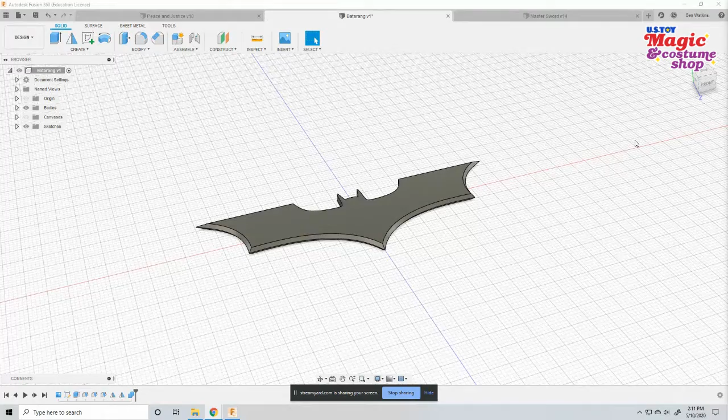Before I dive in, I should explain the software a little bit. This is called Fusion 360, and it will look really expensive if you go to their website, but if you are a hobbyist, you can obtain a license for free. So as long as you make less than 100 grand a year, you can get a free license to use Fusion 360 for your own personal projects as a hobbyist. So you can sell the designs as well if that's something you want to get into.

The program is pretty easy to use, but it is CAD based. If you don't know what CAD is, that's computer aided drafting. It's been used in architecture for umpteen number of years. Basically, you can draw something and then extrude that drawing into a three-dimensional shape. Of course it goes into a lot more depth there, but the idea is that you can create very accurate models down to a fraction of a millimeter.

Other 3D programs that are free, like Blender, are more of a sculpting program where you have like a lump of clay and you're trying to mush it around until it looks like the thing you want, but the scale might not be precise. You might have to use a different program to get it the size that you really want. But starting with a CAD program and using millimeters as your measurement, you can create a very accurate model that your 3D printer will print exactly the size you put into the program.

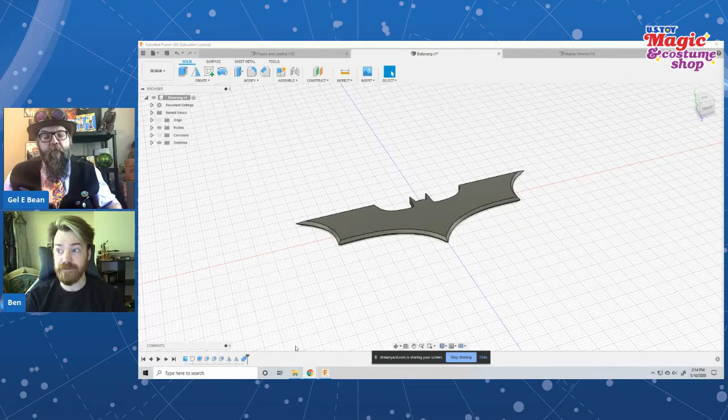Okay, right on. So walk me through like I'm just starting the project. Okay, what do I do? Let me back up this project here.

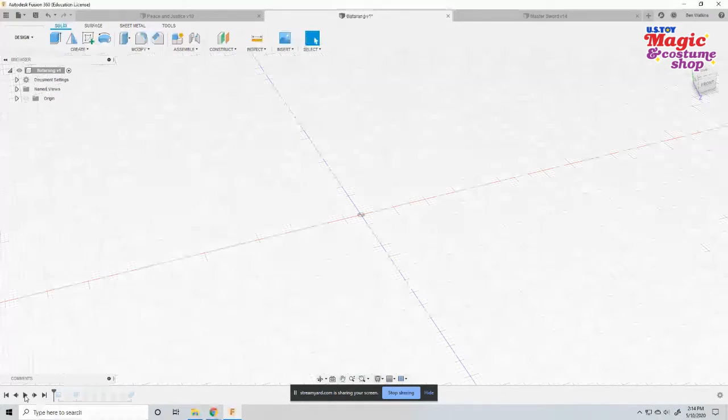You can see I'm dragging this - this is a timeline of the actions that I've taken for this project. It keeps track of everything I did, and I can hit the play button here, and it's going to go kind of fast. Unfortunately I can't slow it down, but you'll see different things happen really quickly, and then I'll go back and explain each one and how it was put together. So if I hit play, you see a picture, and then some things happen there. I know that was really fast - I'll play it one more time. You saw a picture, you saw a drawing, and then a 3D model sort of pop up out of nowhere, and then it was gone.

The first thing I start with is what's called a canvas - up here, insert canvas. You can place an image into your workspace, which makes life really easy for tracing things. You can use a different drawing program to draw your elements and then import them, though sometimes it gets a little weird about that, so it's always best to draw natively inside the program. But once you've inserted your image, you can calibrate your canvas by right-clicking on it, and if you pick 2 points on your image, it tells you an exact millimeter amount of what that distance represents. You can change that number and it will automatically scale your image to whatever size you tell it.

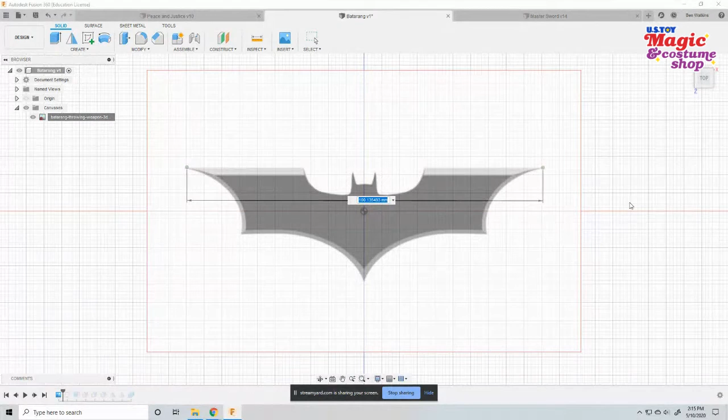Okay, so I need to at least have a drawing of what I want. It can be in 2 dimensions though - a two-dimensional image. Of course you could freehand everything, but because we're cosplayers and we're trying to recreate things that already exist, this is probably the best way to make that happen. Okay, so does it need to be in a certain format, like a PNG or a GIF? No, it'll take pretty much any image file - anything that is considered an image file, it'll take it.

Since we have that canvas on there, the next step would be to draw on top of that image and create what's called a sketch.

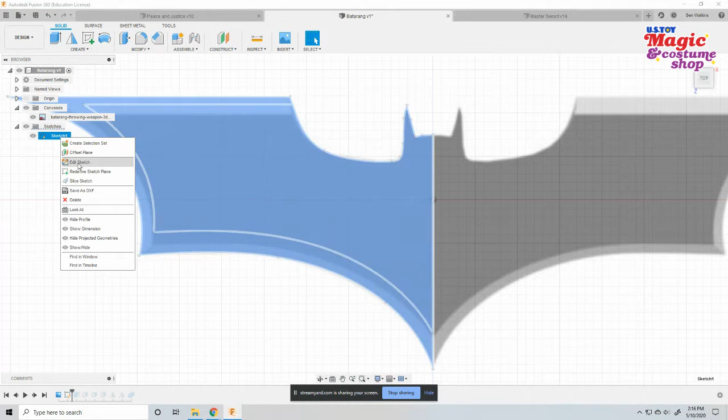You can see these black dots sitting around the batarang here, and some lines on top of it. Over here at the top, we have create a sketch, and I'm just going to go in for editing mine so you can see what that looks like. It doesn't look very different at the moment, but there's a lot of different drawing tools here, creating lines and curves, rectangles, circles. You can mirror your drawing, creating arcs and splines.

I don't want to get too far into sketching because that could be a whole lecture in its own right. Well, just riddle me this, Batman. Where do I even start with what tools here? What did you do to get that? Like you said, draw a sketch.

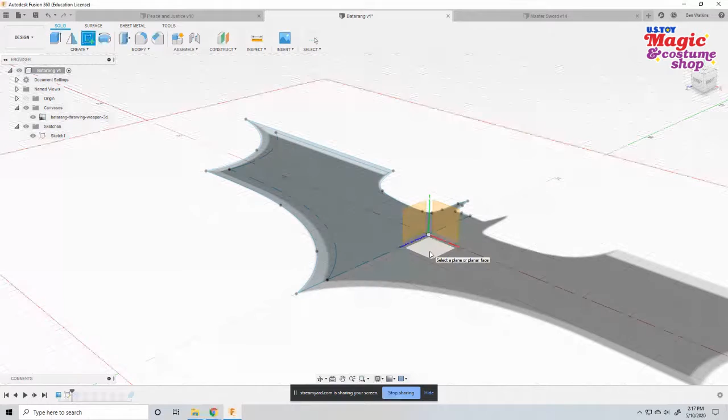What's next? In here that says create sketch, and it says use sketch mode to create basic geometry. So if you click create sketch, it'll ask you where you want to put this sketch, because everything's in 3 dimensions. You can sketch on any of the 3 planes. I would pick the plane that your drawing is on, and then you can take a line and start drawing.

You want to create what's called closed shapes. It doesn't matter what you draw, all that matters is that it's completely closed. So when I hover over these, each shape highlights, and that means it is closed, and that means it can be turned into something 3D.

But if I had just a couple of lines here, see, there's no shape there. It's not closed because there's no connection between these 2 endpoints. So this cannot be made into something 3D easily.

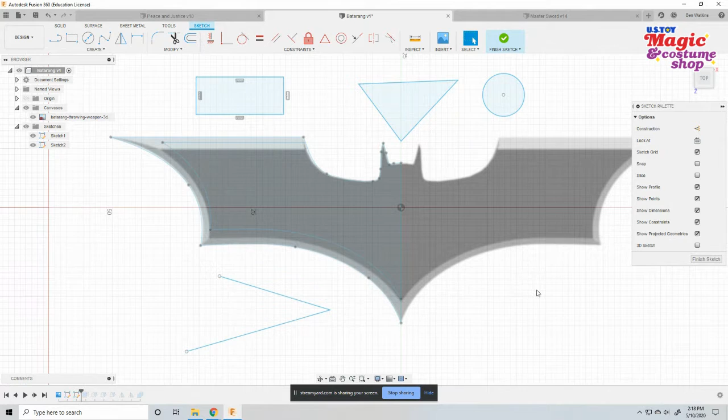So, me being pretty thick-headed, I would just open up my graphic. I would draw on the plane that graphic is on, and I would take the tools necessary to make an outline of that graphic.

Okay, that's where we start. You just want to trace, that's what you want to do. So this shape right here that I've highlighted was me tracing around the outline of the batarang, or what I consider to be the top surface of the batarang.

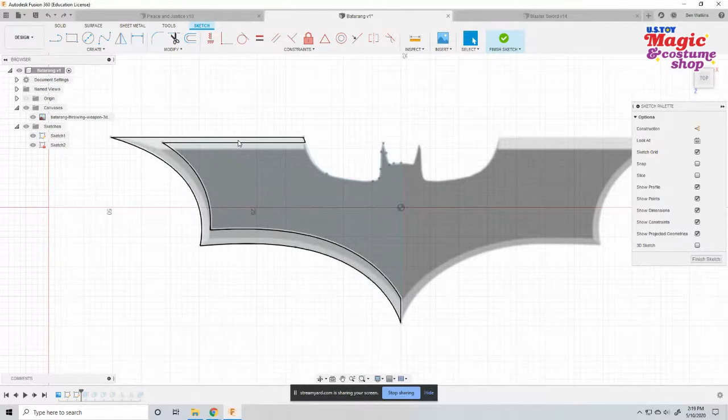Then you'll see there's an extra shape outside of that, and that represents the bevel, because we know that batarangs have a sharpened edge, and we can see in the image that it has a bevel. I drew these 2 shapes to then move to the next step, which is what we call extrusion.

So we have made a sketch, and now we're ready to extrude it. I'll show you what the extrusion step looks like, and then I'm going to back up and do it for real.

So up here, these major tools are basically all you use. But the create menu has so many options in it, you can create so many different things, but we're going to stick to the basics. Extrude is the easiest thing you can do. It adds depth to a closed shape, so it makes it 3D.

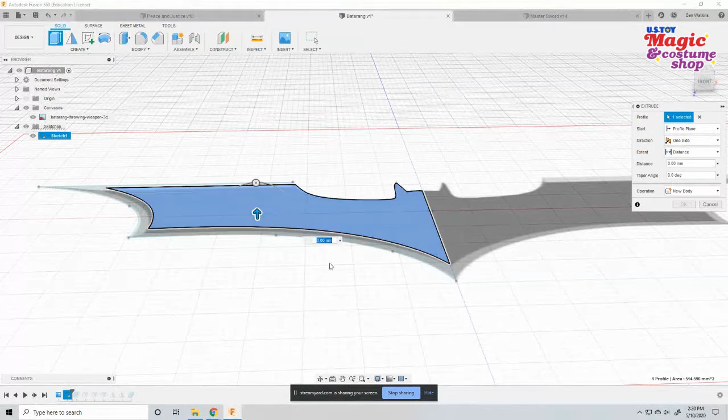So if we click on extrude and we click the shape we want to extrude, then we can click and drag this arrow. And you're just giving it depth right there.

Is what you're doing with extruding giving it depth, correct? Yes. So it tells you in millimeters or centimeters how thick it's going to be. It is in millimeters, everything with 3D printing is in millimeters. Staying in millimeters is the best way to go.

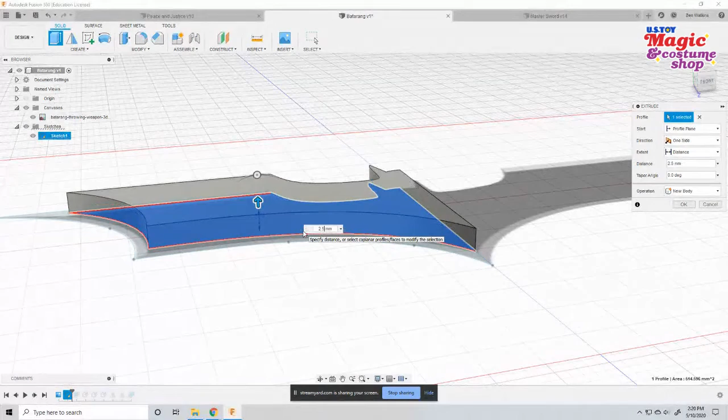You can click and drag your mouse to give it a different height, or you can type in the box and give it a very specific height. And then once you hit OK or hit enter on your keyboard, then you have a 3-dimensional shape.

So do you keep a ruler close to you with millimeters and centimeters to kind of give yourself a point of reference?

For the most part, I've memorized how many millimeters are in an inch because I do this so much. You're one of those guys who does a pinch of this and a little bit of that in every recipe, aren't you? A little bit.

Okay, sounds good. There's no shame in bringing up Google. If you bring up Google and just type millimeters to inches, it brings up a calculator and you can enter the millimeters and it'll convert it to inches, or vice versa, so you can get a better idea of what's happening.

Is something going on with our sound? I see a comment about sound. In and out, but that's just more or less the nature of the streaming that we're doing. Okay, I just wanted to make sure that I was all right. Yeah, you're absolutely good.

So we have this semi-flat 3D shape. Then we want to create the bevel that goes around the outside there. I think when I originally did this, I tried a few different methods. We're going to stick to something really basic because there are multiple ways to do this bevel.

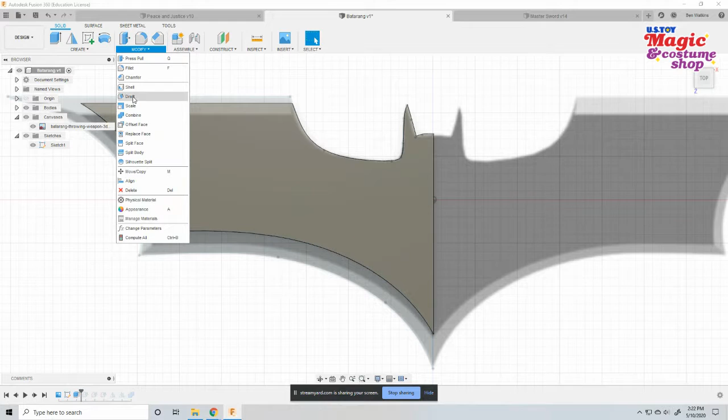The easiest is what's called a draft. A draft allows you to choose a surface, and it makes an angle for that planar face. So one face of a 3D object is a planar face, and by selecting draft, you can select that face, if it'll let me.

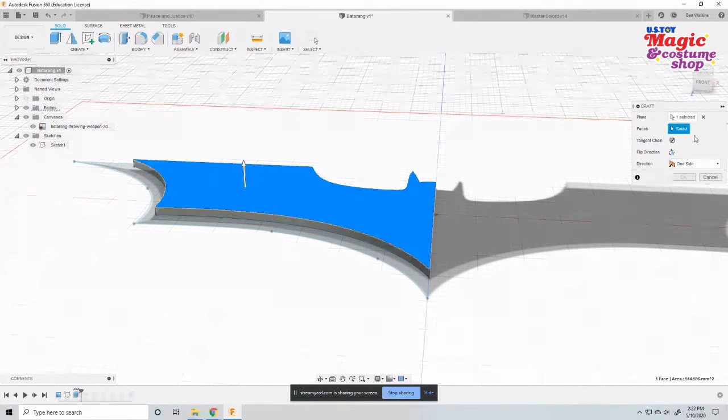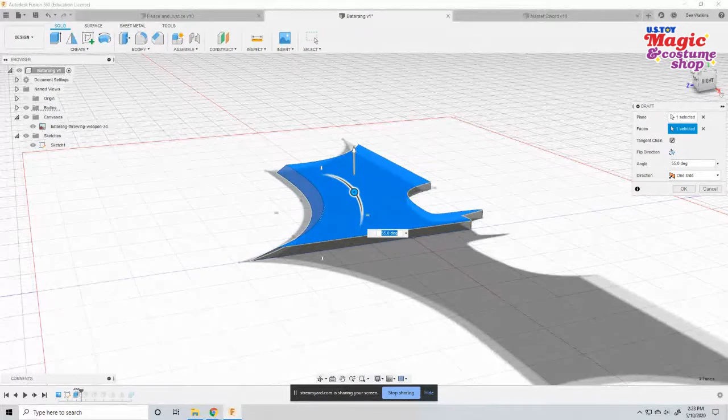You can select that face, and by turning a number of degrees, you can create what's called a draft. And that's a CAD term. But see how I can make it much bigger or much smaller, just depending on what I think looks good is what I would stick with.

And I would do that to each area that needs a bevel. It's pretty straightforward, not a real difficult tool, it just takes a little bit. So the draft there, that's their term. It's like Tokyo Drift, but in the past tense.

Okay, gotcha. Yeah, it's like the past tense of Tokyo Drift. Sure, okay, we'll go with that.

So do you usually just make that draft connect to the other shape that you made, or what's the dealio? You'll notice that it does not line up with the other shape there, and I think it's because I decided that the bevel would be a little too wide. So this is just what I thought looked good. And that's something you want to remember as you're 3D modeling: trust your eyes. If something looks off, it probably is. Just do what you think looks good.

Okay, so your bevel doesn't have to meet the other thing that you sketched out. Not necessarily. The other thing I sketched out, I apologize, that might have been confusing because I had drawn it with a different method in mind and then ended up doing something simpler later. And that happens too, a lot of this is experimental. So if you're getting into 3D modeling, just play around with it and try something, see what happens, and then go, oh okay, that was cool, or oh no, that didn't work at all.

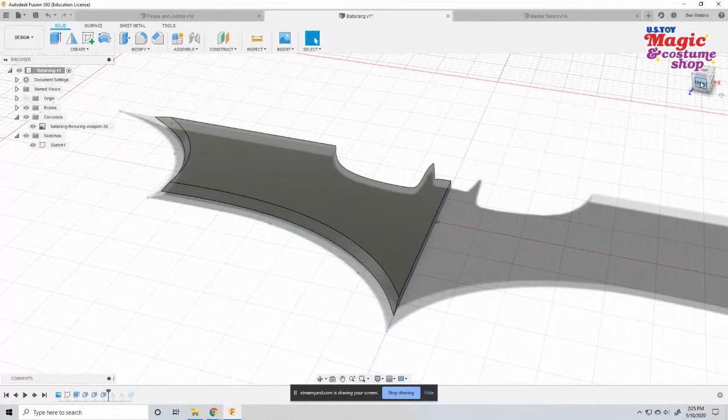Okay, and so this took you how long to print out? Like what happens next, once you got the bevel and everything? There's only half of a batarang here. The reason I only drew half of it is because I wanted to make sure that it was symmetrical.

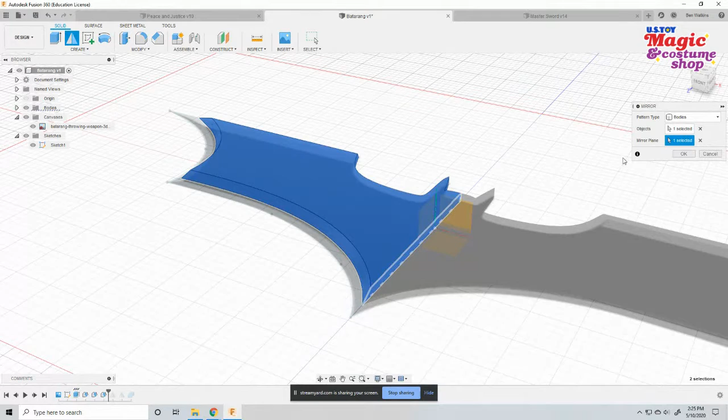And so the next step is what's called a mirror, and mirroring is really, really cool and really, really easy. So up here in our main tools, mirror, if I choose the body that we've created, which is just the name for our 3D shape in the program, they're called bodies. If I select the body and select the midline of the batarang as my mirror plane and hit OK, it mirrors the batarang and makes the other side for you.

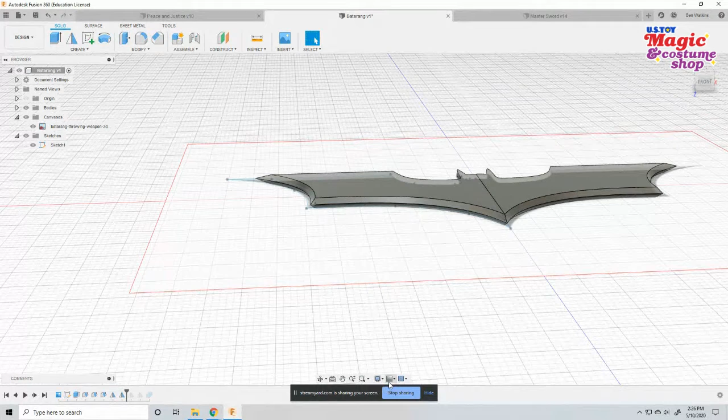Nice. And then if I mirror both of those halves, but then select the underside as my mirror plane, I can double the thickness of my batarang and it'll have a double bevel, which would look really, really professional and cool. So I'll get rid of the grid and the canvas so you can see this better. Now you can see the two halves and how that looks more like what a batarang probably would look like.

And those two mirror actions took a second to do. Okay, now I've got a model of a batarang. How do I mass produce these things? Because I've got crime to fight in Gotham City.

Once you've completed your model, you can right click on it and there's an option to save it as an STL file. STL is a universal file type that 3D printers will read and then print. So once you have an STL file, you would take it into a slicing program, which breaks down the model into code to tell the 3D printer what to do in order to build that object.

Nice, that's just absolutely fantastic. All right, I'm going to ask us to move on to another thing here.

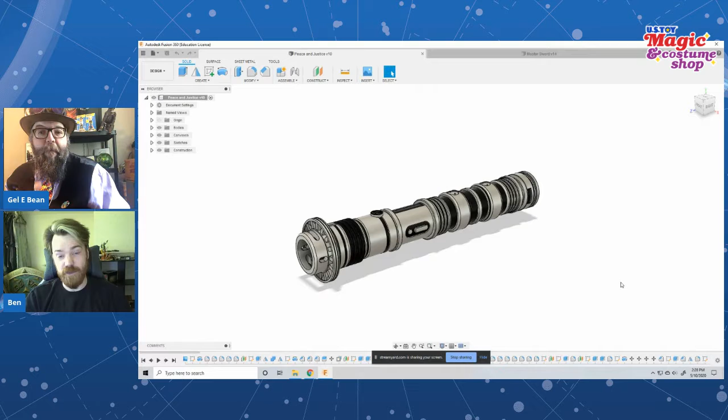They also use very similar parts at the lightsaber shop at Disney World. Of course, I did not make mine exact to Disney's plans because I don't have access to those sabers, but it is inspired by that same design and similar terminology.

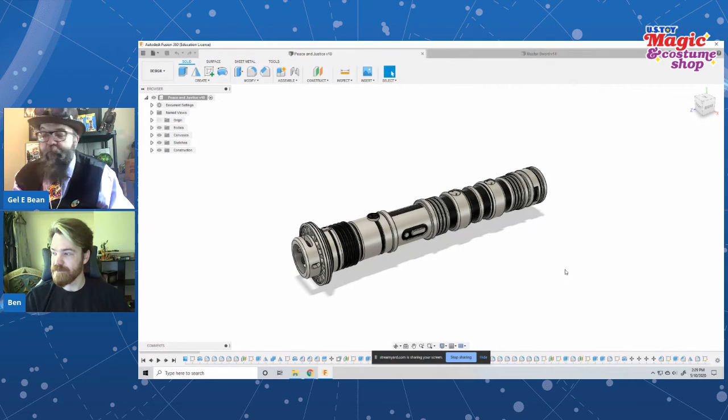Yes, also to comment on Jonathan Kipp's comment there, a 3D metal printer is really cool if you've got about $30,000 in your pocket, if you want to print in metal.

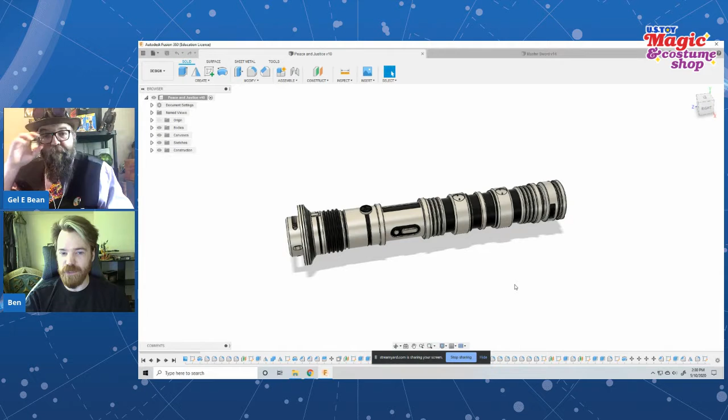So with lightsabers, they're cylindrical, which makes them easy, but also they have some complexities. The complexities come in with the details around buttons and textures and things like that, especially the emitter end with these little fin things here. That was an interesting process. I'm going to walk through just a few of the things I did. I'm not going to go into as much detail because that would basically use up the rest of our time.

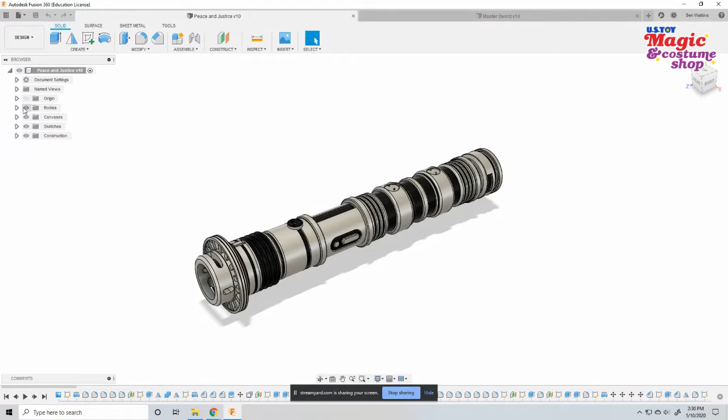But basically, in the first example, we were using Extrude. With lightsabers, we use an action called Revolve. Revolve takes a drawing that you've done and rotates it around an axis and creates a cylindrical shape out of that drawing. So I'm going to hide the bodies, and you can see this giant list that popped up here. These are all the sketches I made just for that lightsaber.

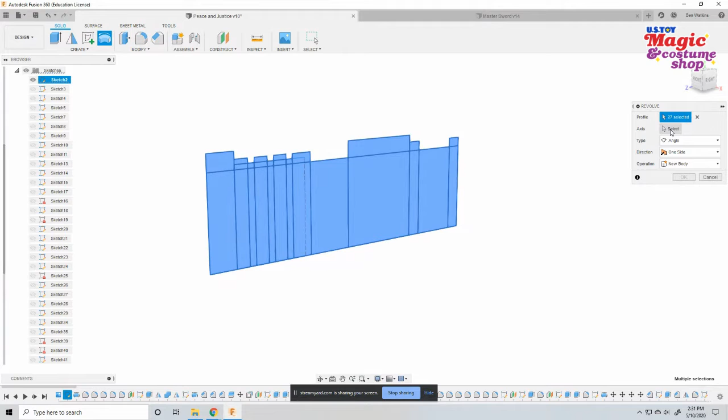Oh my gosh, one of the first sketches I made looks really, really simple. But when we go to revolve and we select all those shapes and we select the bottom line as our axis, then we can click and drag.

There we go. Click and drag your mouse, and you'll notice that it takes my shape and rotates it around as far as I want it to. I can create a quarter of a lightsaber or a half of a lightsaber, depending on what I'm doing, or I can just create a whole 360-degree shape. And from that simple sketch of a bunch of rectangles, now I have this super complex textured cylinder.

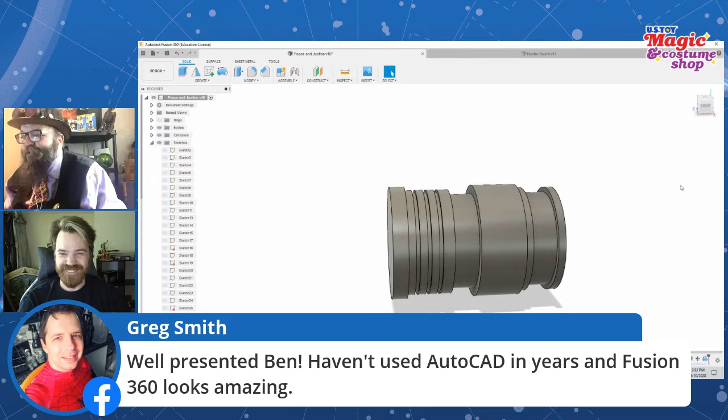That was sweet. It was like taking just a plain board and turning it into a lathe, on a lathe into... Yeah, that was really, really sweet how quick and easy that was.

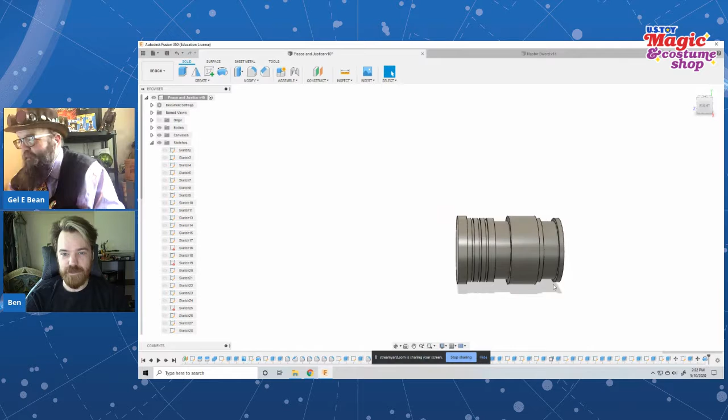And so you did a bunch of those little parts and joined them together to make a lightsaber. Is that essentially what's going on? That is essentially what I did. Some things that I did were called fillets and chamfers. These are things that just make the model look nice.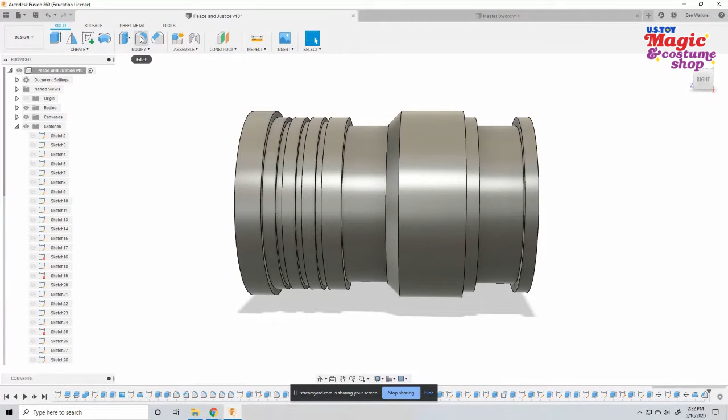So these two tools up here, if I go to chamfer and select one of my edges and click and drag, you'll notice that I can create an angle, and it creates the angle around the entire object. So now it has a slightly different profile. I didn't have to draw that—I was able to just draw rectangles really quickly and then use the chamfer and filleting tools to make things look either round or angled.

So that's kind of like the drafting we saw with the bevel, but in 3D on a circle. Yes, drafting would look quite different on this kind of model. Probably not something we'd want to do, but fillet and chamfering is just a way to soften your edges and make your model look nicer.

Okay, excellent. What's next? All right, let me undo that stuff. Let's go to... where am I at here? Let's find it.

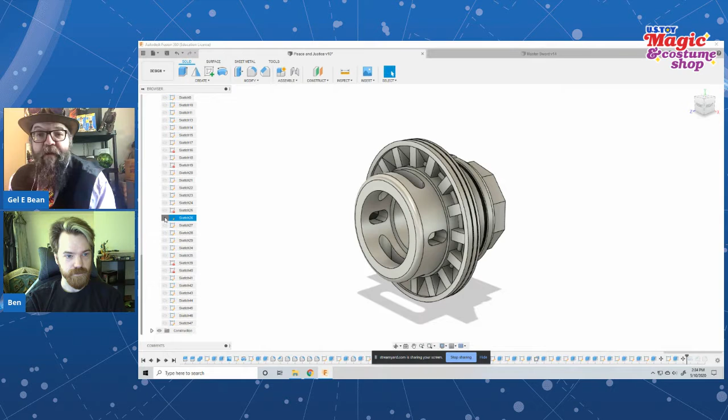And you can either work—Ben, do you print things for people after they've designed them? If they want me to print something, then that is within the realm of possibility. I will only 3D print kits, so I'll only 3D print the raw parts and then send them to you. I don't do finished props anymore—unfortunately they take a lot of labor and love that just goes outside the budget sometimes.

I get you. And you know, if people are looking for other things, if you're not available, they can go to Hammerspace and get some of the printing done—they can send it to that as well. But they can get help from you just by calling you up and paying a little bit for help and services, right? Or can you design stuff for them and send them a file? I have done designs and sent files. That is also within the realm of possibility. I don't mind doing that.

Most of the designs I make, I also put up on CG Trader. They'll also be going up on Etsy soon-ish once I get the bugs worked out with renders and stuff, because Etsy requires really big images. But anyway, they'll be up on Etsy, and they're up on CG Trader, where you can buy the models that I make.

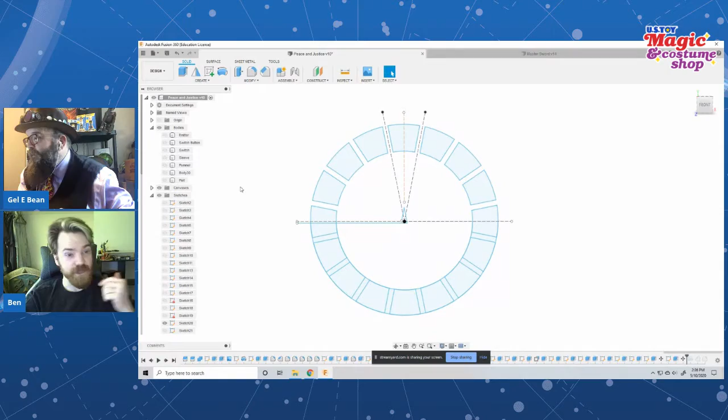Sweet, all right, let's see what you're working on—show us something new. So this is where the emitter came from. You'll notice all those fin-looking things there, and these shapes here. Basically, I think this might have been a slightly older sketch, but the process is the same. Let me see if I can...

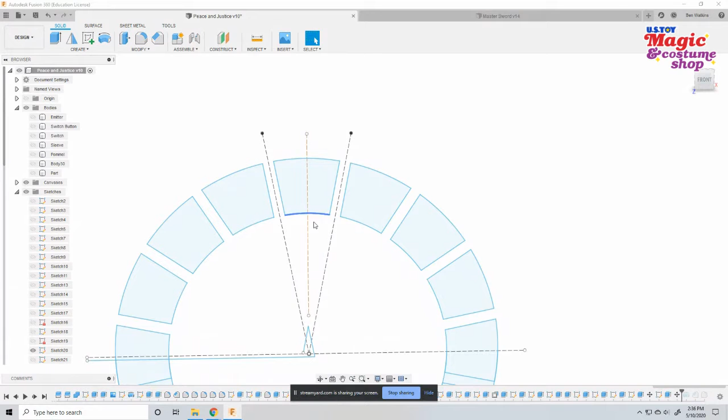I'm going to delete most of what we've got going on here. Oh, come on.

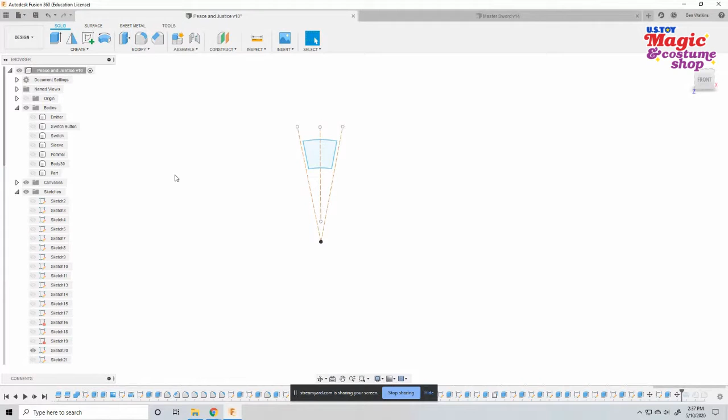Yes, I know, it's going to be angry at me for a minute because it's got to re-render all that stuff. Well, when you start deleting things that have later actions that it affects, then it gets upset. You're messing with the time and space stream, Ben, by deleting all those parts. That's why it's upset with you. Okay, I get it, I am messing with time and space.

Let's say that you had a pattern like our emitter where there's a bunch of these shapes going all the way around. You'll see that I designed the negative space in between these bridges because of the way that I wanted to do it. But the idea is we're going to create a repeating pattern along a circle.

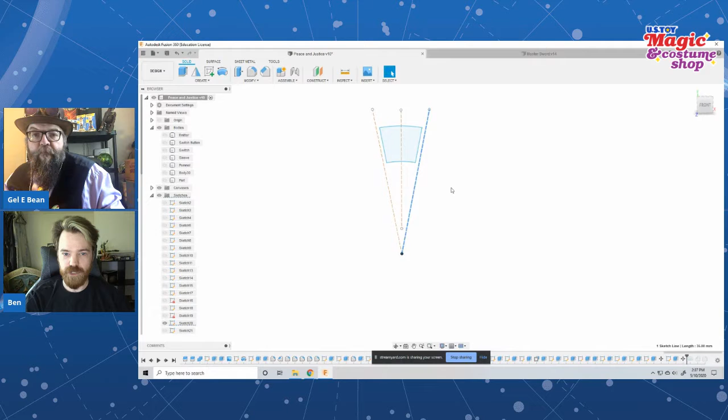So the original sketch that you saw would be a nightmare to draw out, because you'd have to do all kinds of sketching to try and make all the pieces look exactly the same. But if I just draw one of them and have these dotted lines, which are called construction lines that you can create... let's go into edit sketch.

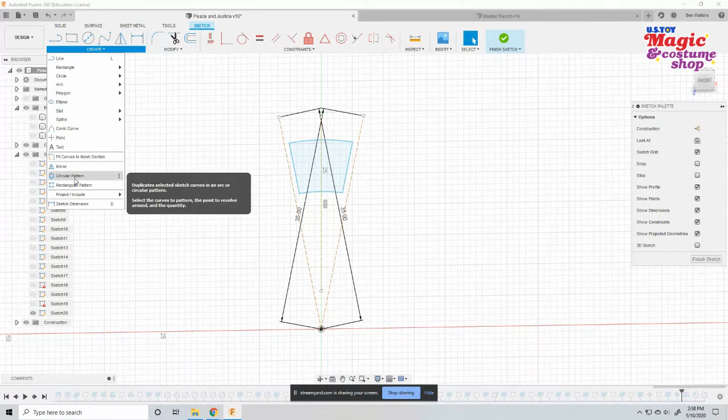If I go to my sketch menu and go to circular pattern, I can select the shape that I've created, select the center point that I want it to rotate around, and then tell it how many of these I want. Right now the default is 3, so I can go up to 4, 5, 6, 7, 8, 9, 10 of them. See, each one I add, it just squeezes them closer and closer together until I have the number that I want.

And does it automatically do that, so you don't have to do any thinking? I didn't have to do anything. All I did was select my shape and a central point that I wanted it to rotate around. Now I have a sketch with 14 identical shapes rotated around an axis.

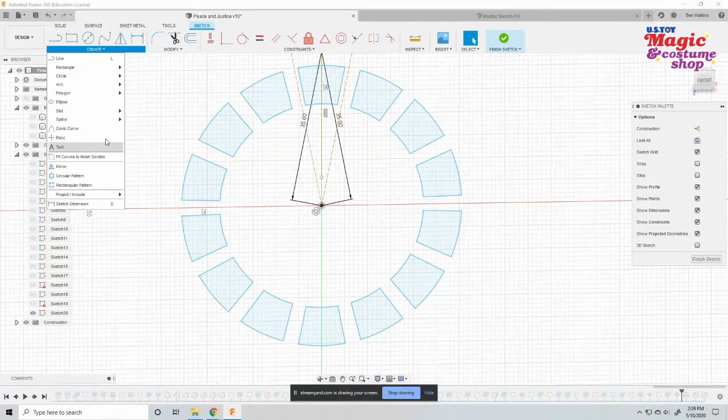You can also do something similar with what's called a rectangular pattern. It creates the same shape along rows and columns instead of around a circle. But since lightsabers go around a circle, that's probably the best way to go.

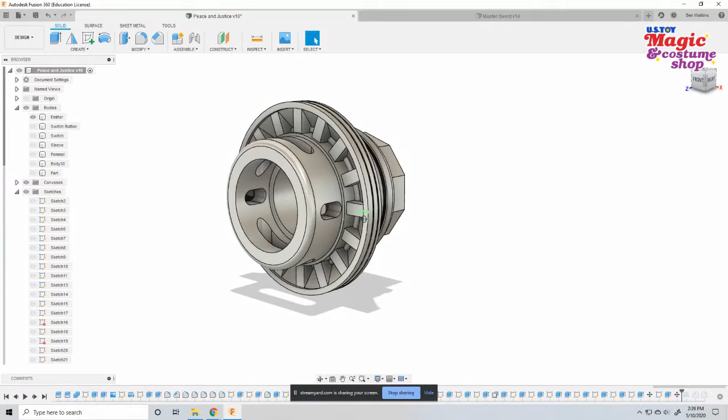I'm going to undo all that damage I just did. So that was essentially how I created the cavities that made up that shape there. Everything else is basically just revolved cylinders like the original action that we did. And then these cutouts are super easy.

To get these little vent cutouts, you just draw a shape, and then when you extrude from one object through another object, it will change what it wants to do. So let me make a quick sketch here and I'll show you what I mean. We're not going to make this permanent, we're just going to do something random.

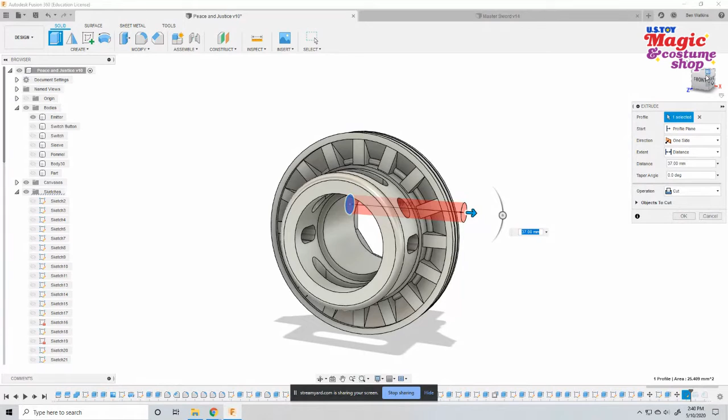Let's say that I wanted a hole through that - why I would, but let's go for it. So I've created this sketch out in 3D space, and if I extrude it through my shape, you'll notice that it turned red. And when it turns red, it changes its operation.

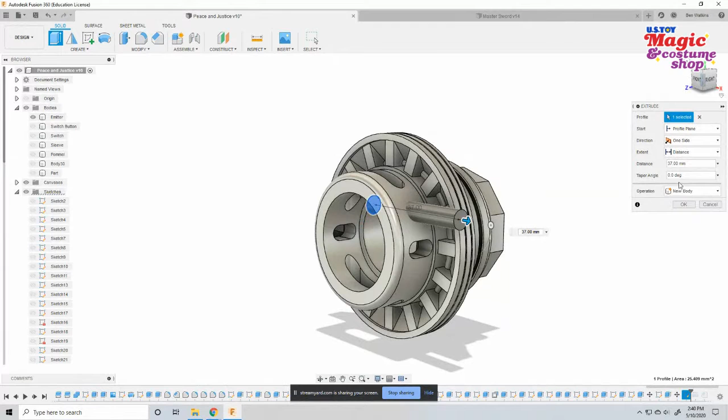You can tell it to cut through things, you can tell it to join to that shape, or you can keep it as a separate new body, which means it has no interaction with what you're doing right now. Or you can create an intersection, which means it's only going to leave the part of the shape where your two extrusions intersect or interact. So there's lots and lots of options, even with just the extrude command, to create much more complex designs.

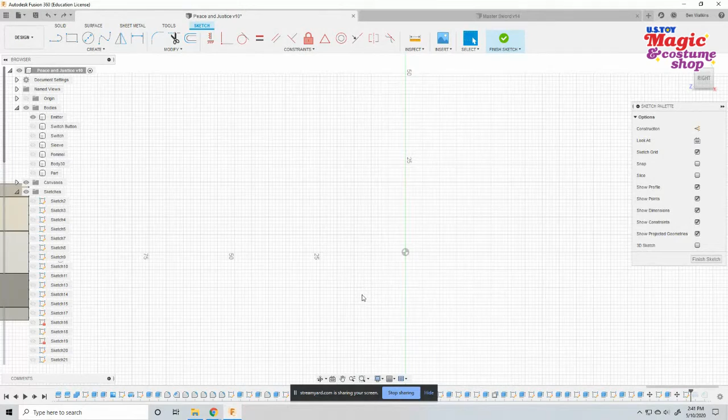Yeah, well, that's absolutely crazy, Ben. Okay, so when you design a lightsaber with all these different parts, and then you just connect them back together in a larger file - how does that process look like when you're building it?

So you'll notice that here - I'll go ahead and move some of these parts so that you can see them separated.

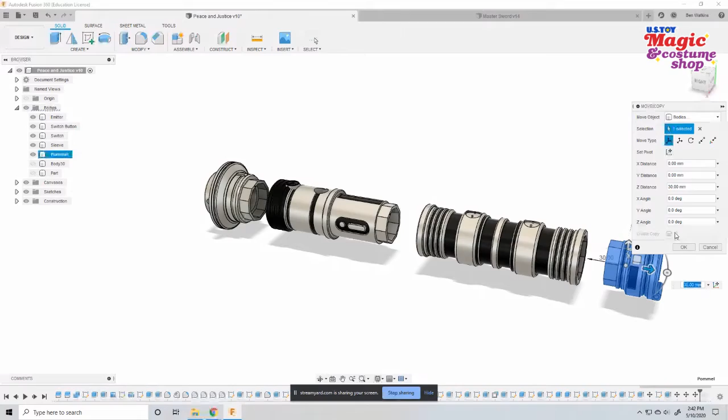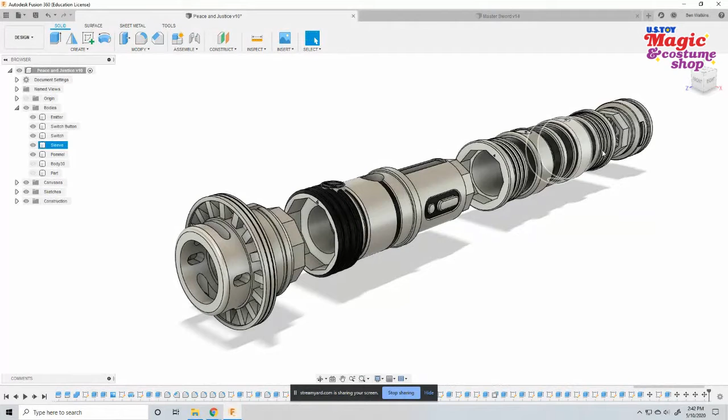So I'm moving my solid bodies, the things that I want to be interchangeable with my lightsaber. You'll notice that I had some hidden objects in there. Each one has a different number of sides so that you never mix up which part's the emitter and which part's the switch, and they always face the correct direction. Essentially, I created a geometric shape that I cut into one piece and extruded from the other piece, so that I could create a connection.

Now, if I wanted this lightsaber to just be one solid piece, I could have these shapes together, and then if I save it as an STL file it doesn't keep objects separate, so it would sort of weld everything together automatically. But if I save each of these bodies as an STL, then I would have a separate file that I could print individually.

So you make one big file and then export as several smaller files. Yes, in manageable chunks, and the manageable chunks are for my printer size as well, because that's something you have to take into account. Like when I was making the swords, I could only have so much of a sword blade fit on the printer, so I had to divide up my project into chunks that I knew the printer could handle by being familiar with my printer size.

The Talion project was built on a $100 tiny printer that was a little workhorse, but it was a DIY kit, and it was not very good.

Nice. Well, hey, real quick, we're coming up at the 45-minute mark, and I want to get into that Talion and see if we can talk about it, because those are so awesome.

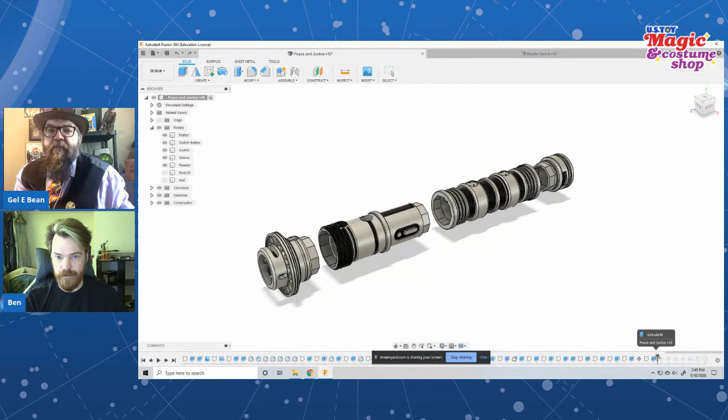Ben, let's talk about Talion and that sword and how that goes. John, once again, real quick, thank you for putting that up. If people go to your Twitch stream on Monday night, they can ask more questions. If you have any questions, please do put it down. I do want to point out Greg Smith right there, Dustin, and Greg saying, well presented, Ben. Haven't used AutoCAD in years, and Fusion 360 looks amazing. Greg's one of our favorites from Camp Cosplay, it's good to see you, Greg, and thanks for tuning in.

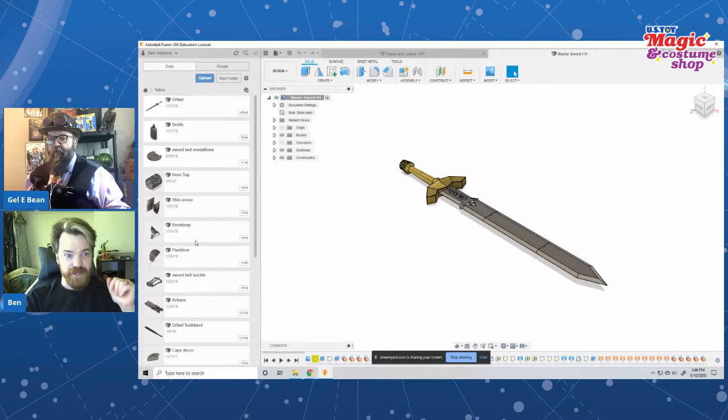So what made them unique was it was my first time trying to 3D model, and I had to learn how to put a sword together with some pretty advanced techniques without knowing everything. It was a really, really tough learning experience, because there are some really unique shapes going on with Talion's sword as opposed to something like Link's Master Sword.

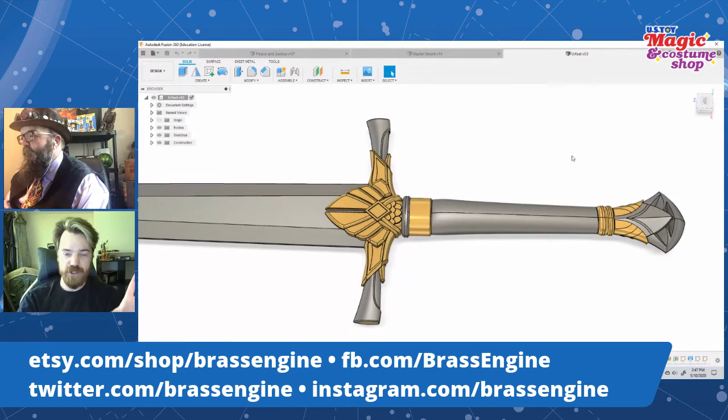So this would be a representation of much more advanced modeling. You'll notice that there are a lot more organic shapes going on, lots of curves, lots of cuts, and weird feathers and wings kind of things going on here.

And a lot of it had no tutorial whatsoever. You could not find any way of somebody else having done something like this. The only tutorial I was able to find was a guy that made a knife, but it wasn't for 3D printing—it was just, oh, here's how I would model a knife. I ended up using maybe one method that he used, but the rest just weren't going to work for what I needed to do.

You're one of those guys that just likes to see a difficult problem to see if you can make it happen, aren't you? I mean, yeah, probably.

But this particular project uses what's called surface modeling, which is a completely different ballpark from what I've been describing up to this point, because there are other modes of using the software. We were in design mode, which is basically just for creating solid objects and geometry. Then there's render mode for making things look pretty, animation mode where you can show how things work, and simulation, which is interesting for engineering projects.

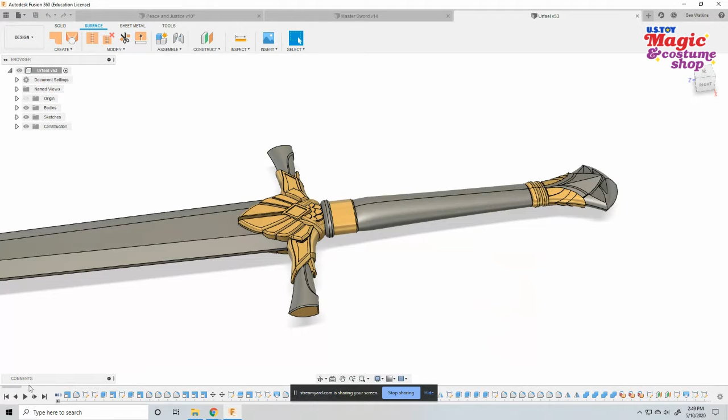Yes. I can't show you on Talion's sword because there's so much going on here that it would bog down my system if I try to change anything. We're going to go to the Master Sword, or the version of the Master Sword that I created, because it's a lot lighter model as far as how much is going on there.

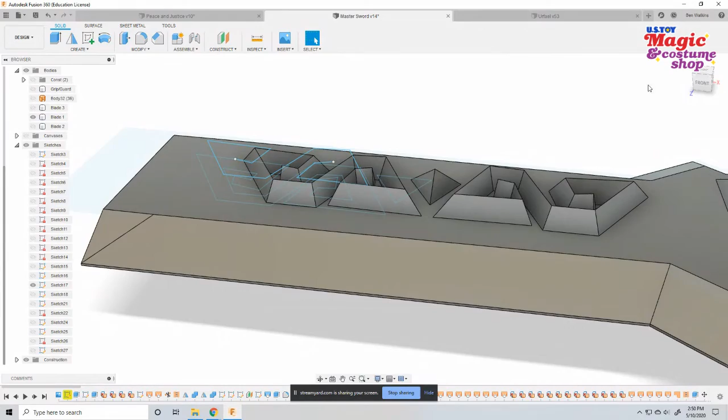So we're going to find the sketch that exists. There it is. All right, I'll turn it so you can see the shape here that I wanted to create. Looks like a little pyramid and this sort of weird S-shaped looking thing, right? Yeah, and I think I drew those when I was in the 5th grade to be cool.

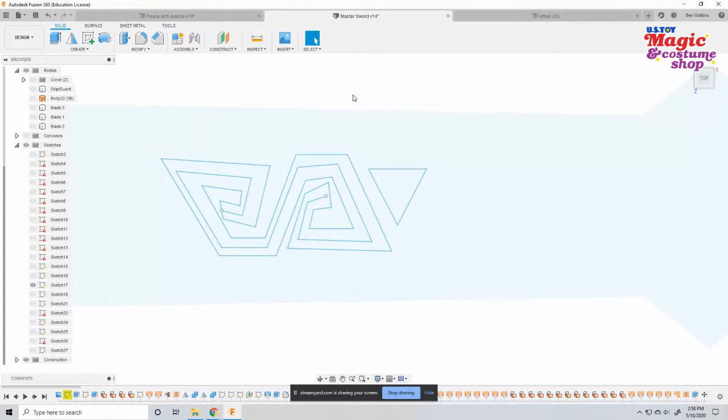To create this, I tried a couple of different methods. The first thing I did was I created my S shape, and I tried to extrude it up and then draft angles around to see if I could get it to meet a central point. It wasn't working because the angles are not equal all the way around the shape. So this was going to require surface modeling.

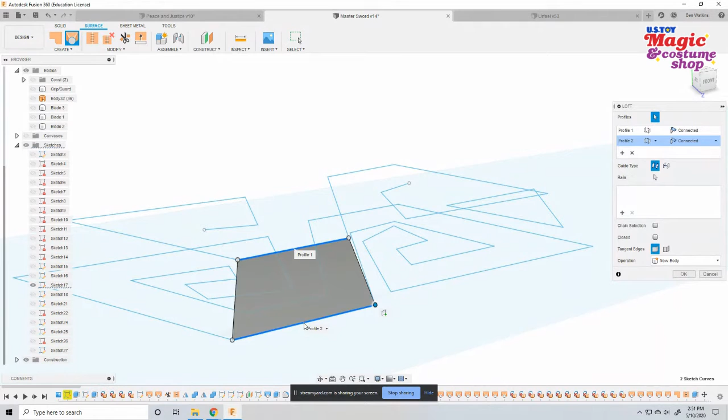So I had to create my closed S shape. Then I had to create a drawing a distance above it for the center line of that S shape, where I wanted it to come to a point, like a triangle. Then, under my surface modeling tools, I can create a loft, and I can select one line from the top and one line from the bottom, and it creates a flat plane between those two lines.

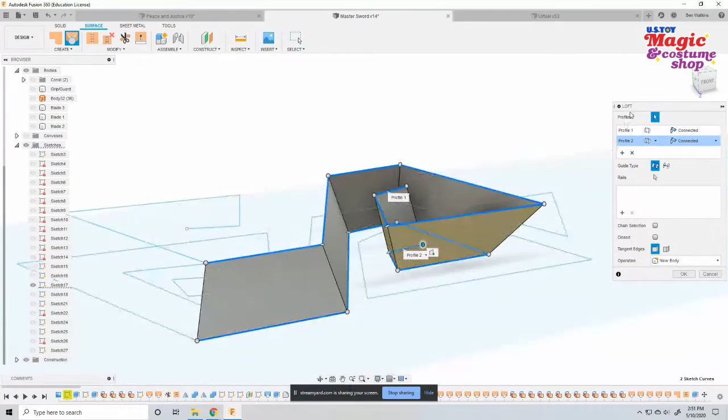And in most cases, if you keep clicking the top and the bottom that it matches to, you can sort of build this shape all the way around. Like that. Okay, keep going, because I'm seeing it. I'm still a little confused because it looks like I can see where it's supposed to come to a point, but I don't see it coming to a point yet.

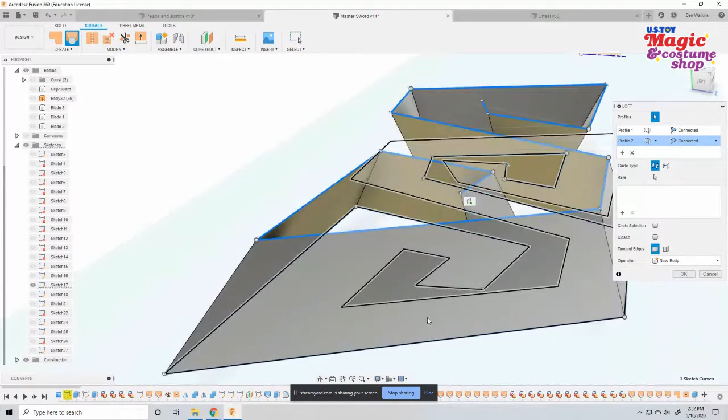Okay. It looks weird whenever I'm clicking through things because it is. Oop, it's not going to do that. Okay. Ah, crap, I lost it! Such as life. So actually, first I'm going to make my two end pieces. And I lost my sketch.

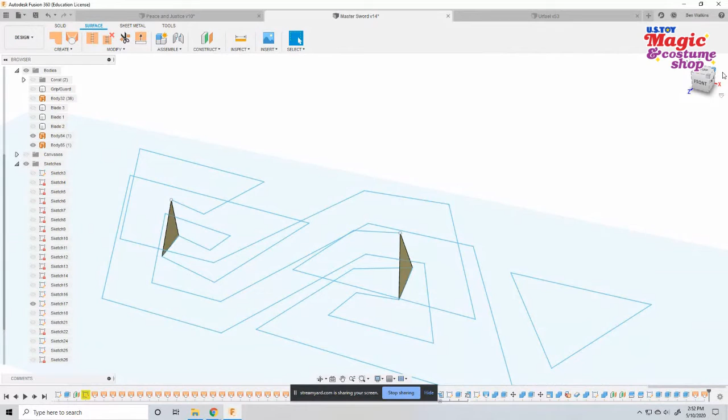One thing about building in Fusion is that if you're not careful, you can lose your sketch because it wants to turn it off as soon as it thinks you're done with it. So I'm going to create my two end pieces here because those are my triangles, right? Okay, I see. So those are my triangles.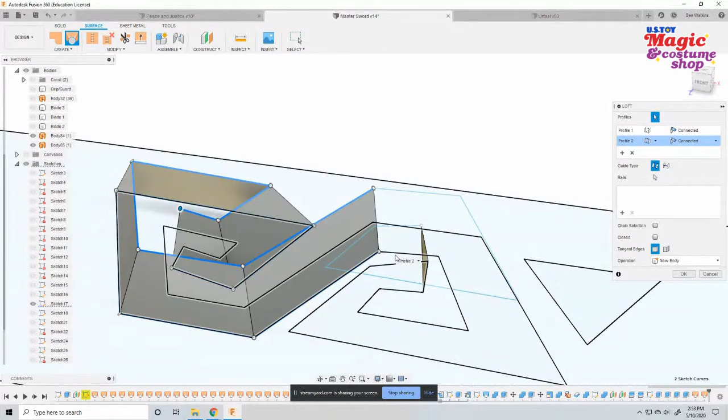Then I can loft, and I'm just going to go from edge to edge, picking the bottom and then the top. Sometimes it'll get mad at you because it doesn't know what you're doing until you've done it, so it's trying to make a guess. Not that one. There we go. Because you see, when I click the bottom, it's trying to guess what shape I want, but then when I pick the top edge, it's like, oh, okay, I understand what you're doing now.

So now I have one half of it, basically. And then I can just go to my other side. And once I start doing the other half, it starts to become really clear how that shape is built.

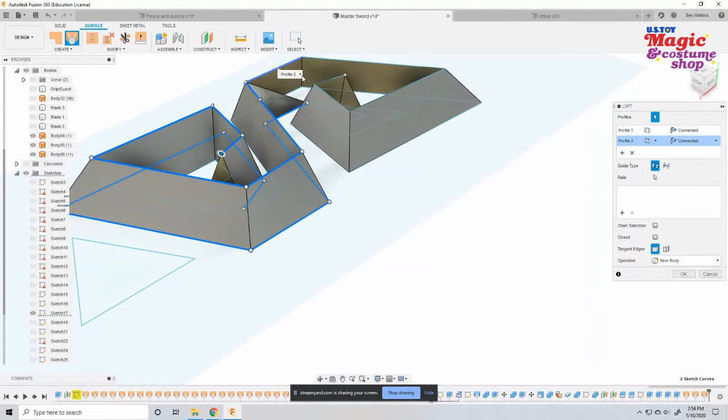I see it forming much better this time. That's fantastic. So yeah, just getting used to the tools and knowing how to move yourself around and doing all the clicking. Now you could do these one at a time, but I like clicking through as much of it as I can, or as much as it'll let me.

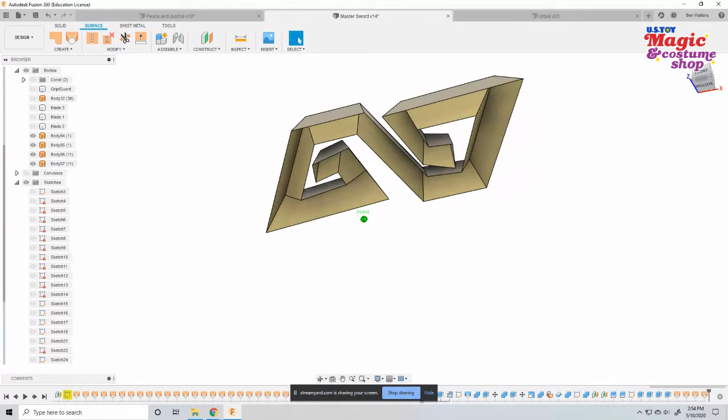All right, so let's turn off the sketch so we can get rid of a lot of those lines. Now this looks like a pretty solid object, but if I turn it upside down, you'll see it's still hollow because we are surface modeling. So we're not creating a solid object, we're creating surfaces.

So then we want to create a patch, if it'll let me. Nope, it doesn't want to do that. Okay, we're going to create a patch, and we're going to tell it where we want the patch made. So we have to outline the bottom of it, because we need this to be solid, right? We don't want just a bunch of floating surfaces. So I have to create a patch in the shape that I tell it I want.

So once I've finished closing up that shape, you see how it turned gold. So now it looks more like a solid object. But over here on the left, you'll see all these orange things. These orange things are the surfaces that I built, and it is still not a solid object.

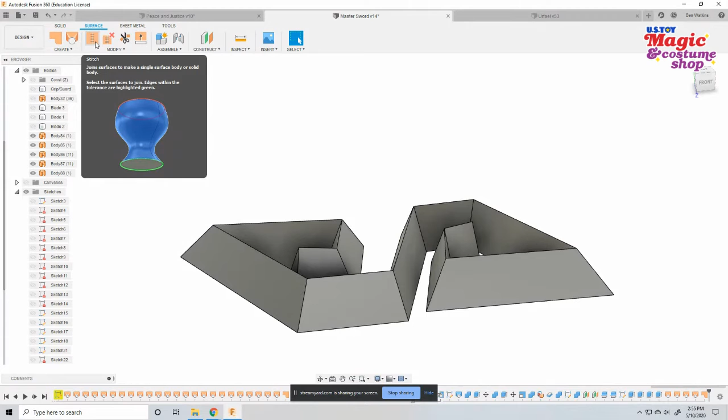So then when you're done surface modeling something, we have what's called the stitch command. And the stitch command allows you to select all your surfaces. If you have green lines, you're good. Red lines means there's something wrong with the way you modeled it. But since I modeled this appropriately, it's all green lines. And when I hit OK, now you'll notice all the orange things went away, and now I have one solid body.

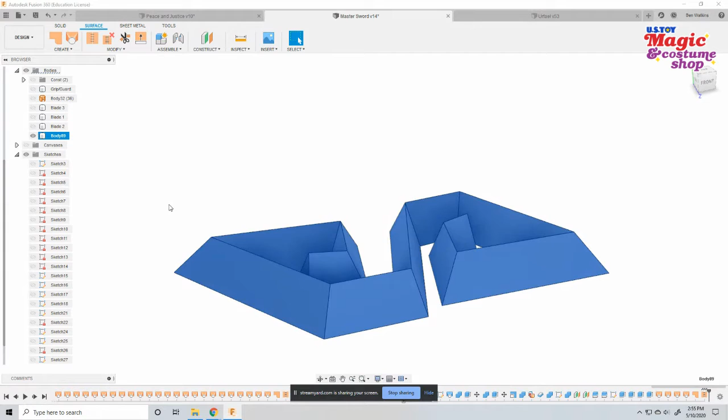Sweet. Modeled according to my drawing.

Okay, so we've looked over a number of tools within this program. And what's the program again that you're using? It's based on CAD, yes, but it's a CAD program called Fusion 360, published by Autodesk, which is the same people that make AutoCAD. So it is CAD based. It's used for a lot of really complex things. If you're into engineering, it's a really cool tool.

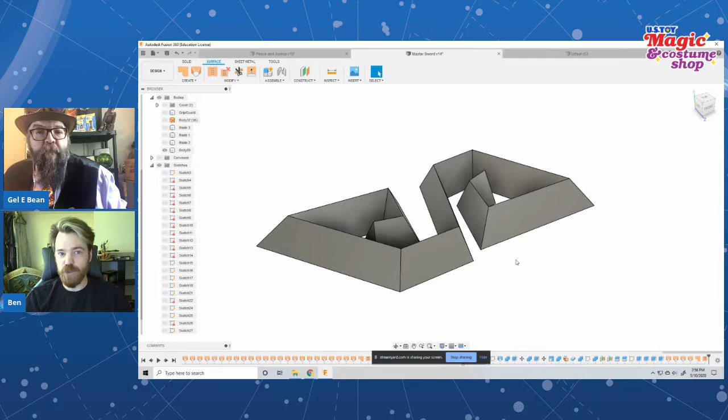But if you just want to do prop building, it has a lot of design tools that are really well built for creating accurately scaled models. And I should mention at this point that this program does have a free-form modeling tool like Blender, so if you're more used to mushing clay around, you can still do that in this program.

And then once you have those files, they can be exported and sent to a 3D printer or someone who can 3D print. And then it's just a matter of, like, I know the Urfael swords look pretty long. Do they just stay together as just the plastic? What's the deal there?

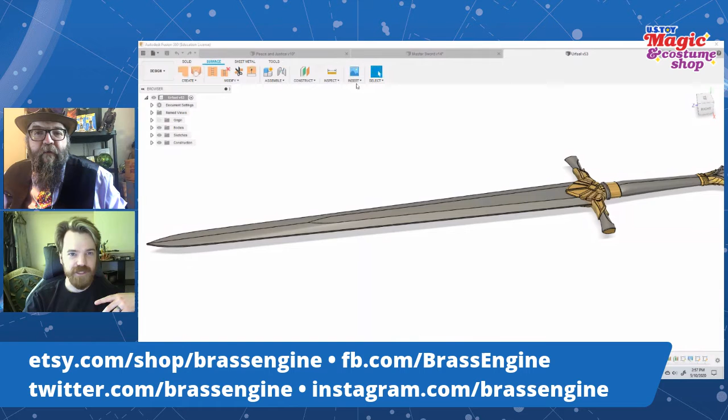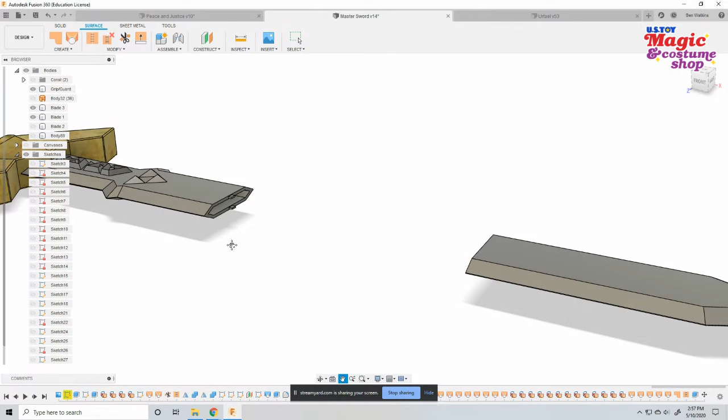You'll notice that on the blade, there's these little tabs, and then on the other end, there's holes where the tabs go. I made the blade hollow because I was trying to use less plastic, because this Master Sword is larger than life, and so it's very beefy. I was trying to reduce some of the weight by creating a hollow bladed sword, and it's still pretty strong. You can hold the sword out horizontal and it doesn't flex with the way that I built it.

But basically, the tabs are just for alignment, and then I use a very strong plastic bonding epoxy to put the pieces together.

The initial sword was made solid with two holes running down the blade, so that I could take steel or aluminum rods and put the sections together along these rods and glue it all together. It worked for the most part, but the metal tended to stretch and shrink just enough with temperature differences that it started to pop the pieces apart. So that's when I changed my method to just all plastic with no alternate core.

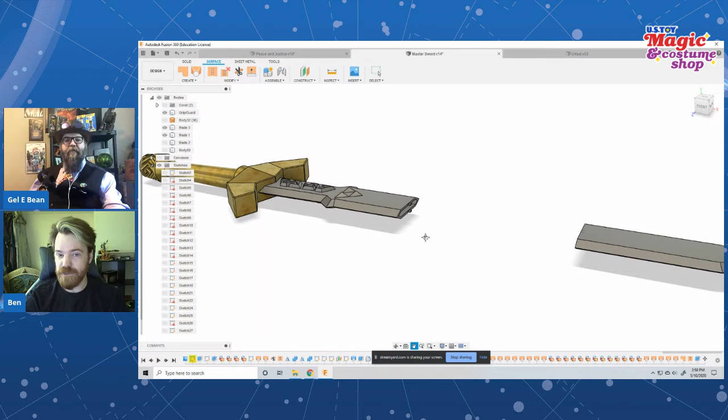In my other sword designs that I have for sale, they're usually solid blade, and then they have what's called hexagonal keys, just like an Allen wrench shape. It's a little hexagonal piece that you print, and it fits into both blade parts so that it's aligned and sits perfectly and is much easier to glue together. That's just absolutely fantastic and a great way of dealing with that problem.